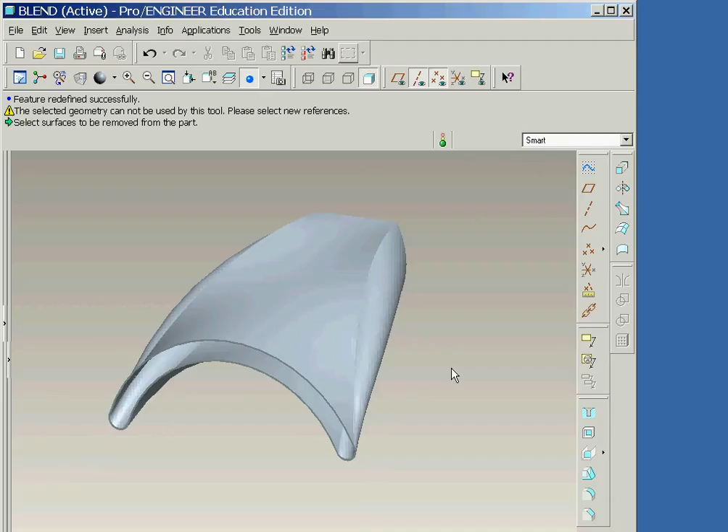We'll begin at a point after having selected to begin a new part using the default template, and then select the drop-down commands Insert, Blend, Protrusion. And then select Parallel, Regular Section, Sketch Section, and Done.

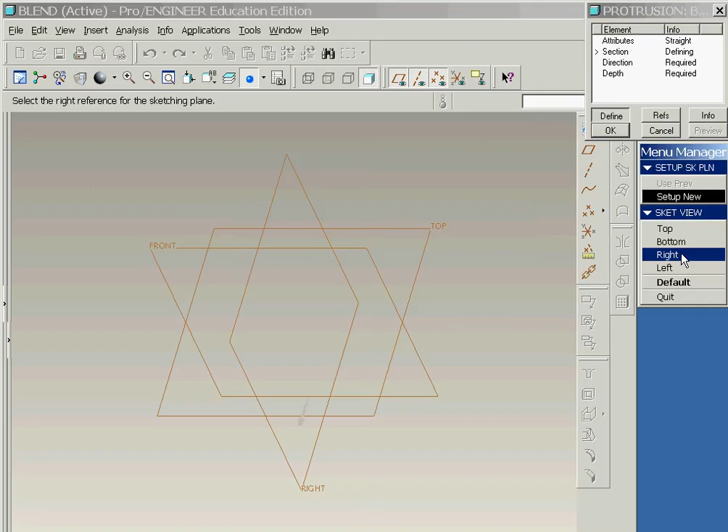The attribute option that we'll select is Straight, followed by the Done command. And now we'll choose the front datum plane as our sketching plane, followed by the OK option. We'll next select the option Right, and then click on the right datum plane to define our reference plane.

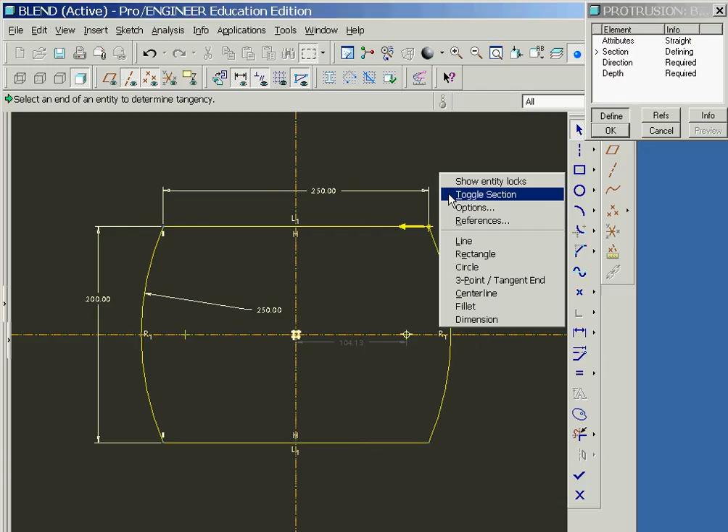After turning the datum planes off, we'll begin sketching our first cross-section. Since we have now completed the sketch of our first cross-section, we'll move on to the next cross-section by clicking the right mouse button and selecting the Toggle Section option. Notice that the first cross-section has now turned gray.

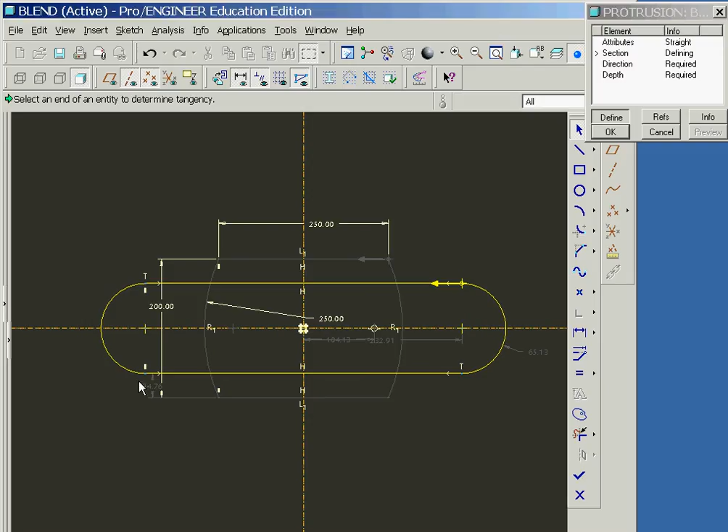We'll now begin the sketch of our second cross-section by drawing 2 horizontal lines. Then we'll add 2 tangent arcs. Now we'll modify the dimensions to the desired values. This completes our second cross-section, so we'll click the right mouse button and select the Toggle Section option in order to move on to the third cross-section.

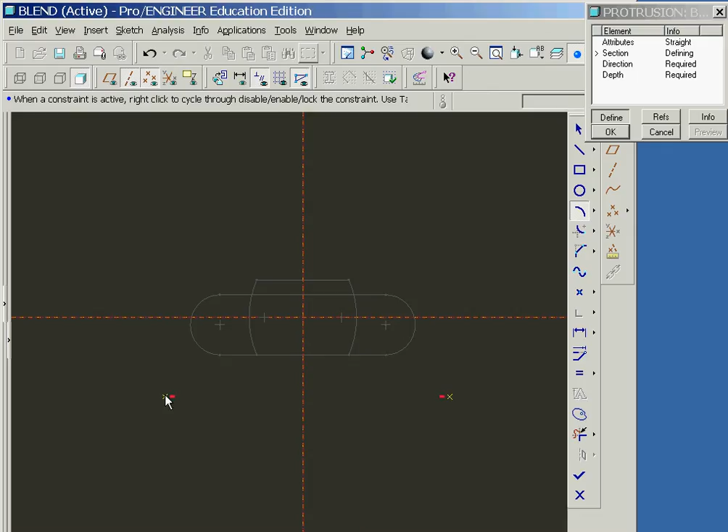We'll sketch our third cross-section. Now we'll select the Continue icon since we have completed the definition of all 3 cross-sections. We'll now enter a depth of 400 for section number 2, and then enter an incremental depth of 400 for section number 3. And then we'll preview and accept the new feature by clicking on the OK button.

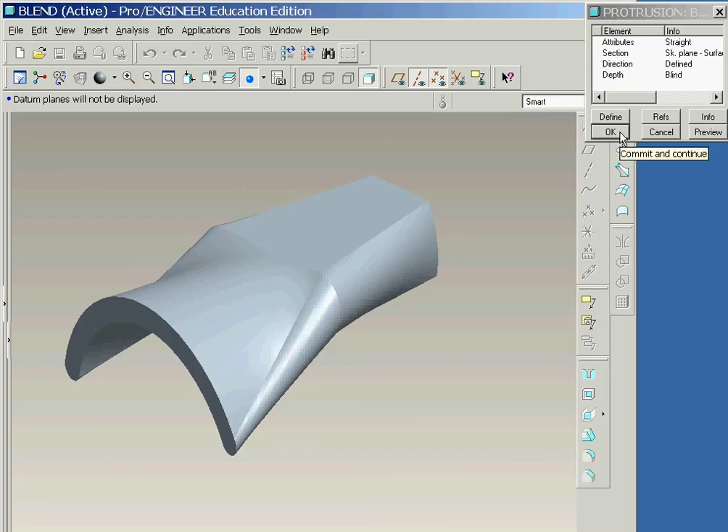Now let's make a modification to the blend that we just completed. We'll open the Model Tree window and click on the protrusion that we just created. Now we'll right-click the mouse and select the Edit Definition option. We'll now double-click on the attribute line in the Element window.

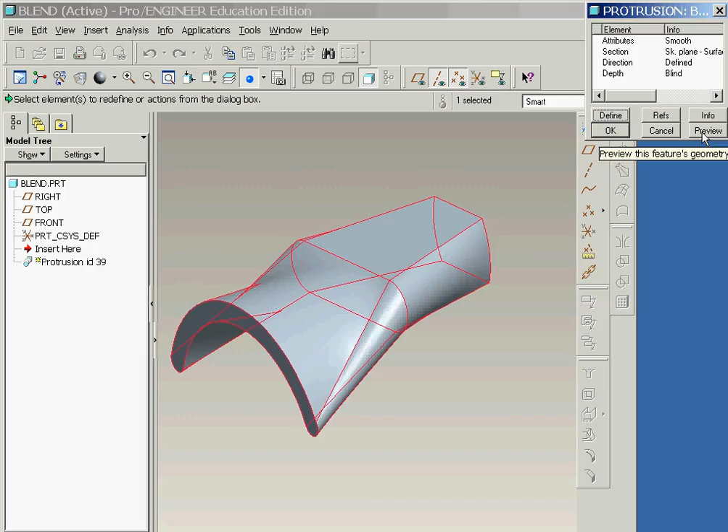And then select the option Smooth, followed by the Done command. And then we'll preview and accept the feature. Notice how the transition from one cross-section to the next has changed from the previous straight blend option.

Our last operation will be to shell out the inside of our new feature. Since the protrusion is already pre-selected, we'll click on the Shell Tool icon. We now have a preview of a portion of the inside of the protrusion being removed.

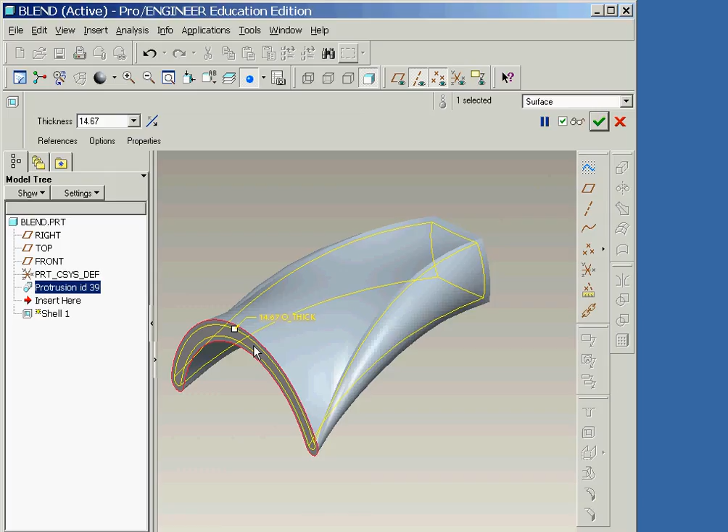Now we will click on the References tab on the dashboard and then click on the surfaces at opposite ends of the blend feature. Next, we'll change the thickness to 5 and then verify and accept the shell operation.